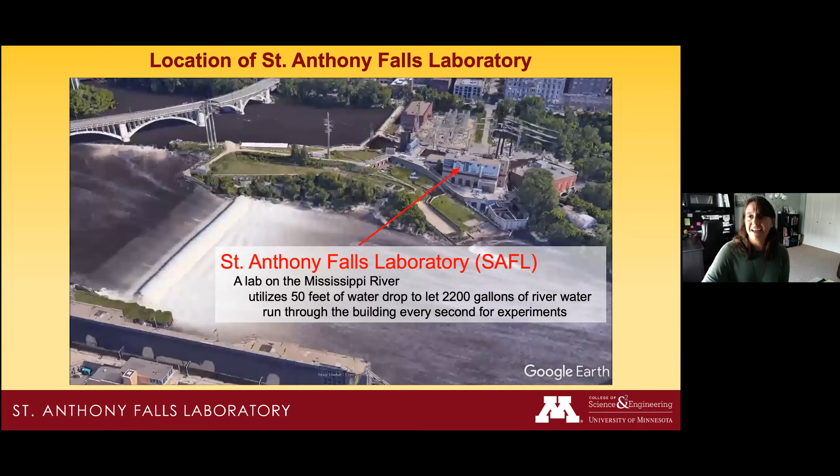But what's really cool is that we are in this specific location for a very concrete reason. And that's the fact that we're able to divert water from the Mississippi River. So right here we have our little gatehouse, and we're able to divert up to 2,200 gallons per second, or roughly 300 cubic feet per second, of river water through our facility for use in experiments. So our location is very deliberate. And it came from the vision of this gentleman right here, a gentleman by the name of Lorenz Straub.

He came to the University of Minnesota in 1930 as a faculty member, and he was fascinated by the concept of using experiments and physical models to better inform design, particularly as it relates to river hydraulics and engineering. At the time, in the 1930s, it was very much about how can we make rivers work and serve us. So looking at hydroelectric dams, looking at levees, looking at being able to essentially move and direct water to where we needed it.

He looked at the location. There was a pumping station on site before SAFL was there, but he was really interested in finding a way to build a hydraulic research laboratory utilizing the Mississippi. So in 1935, after the signing of the Works Progress Administration program to help people get out of the Great Depression era, we were able to secure funding for construction of the building.

Construction started in 1936, and the building was dedicated in 1938. And just because we have them, there are so many cool construction-related photos of the laboratory. So you can see this is on Hennepin Island. You can see all of the limestone that was starting to be excavated. This is where they were starting to dig out for our supply channel that fits into the building.

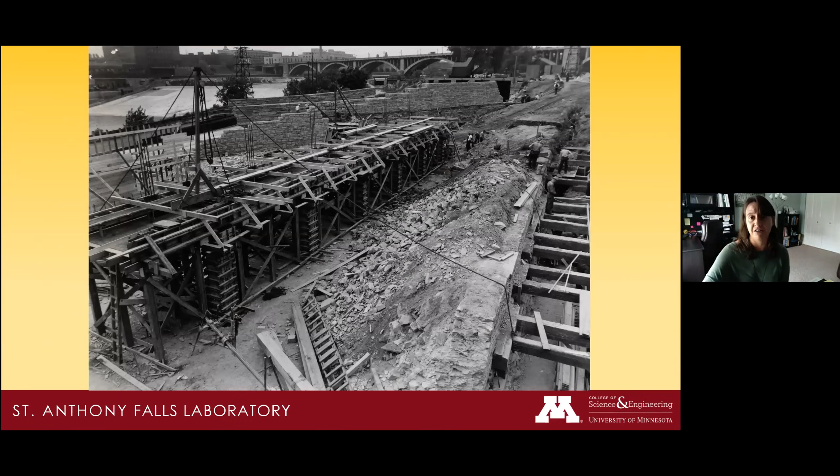And that's because when the pumping station was here, this was the level that the turbine was at, and it stayed there for a number of years. So our basement is called the turbine level. But down here in the corner, you actually see this channel. This is the outflow channel that was designed for the pumping station, and we actually still utilize it as our outflow channel. So water comes in up on top, goes through our building, 50 feet, comes out this channel. And this channel was actually built in the 1880s.

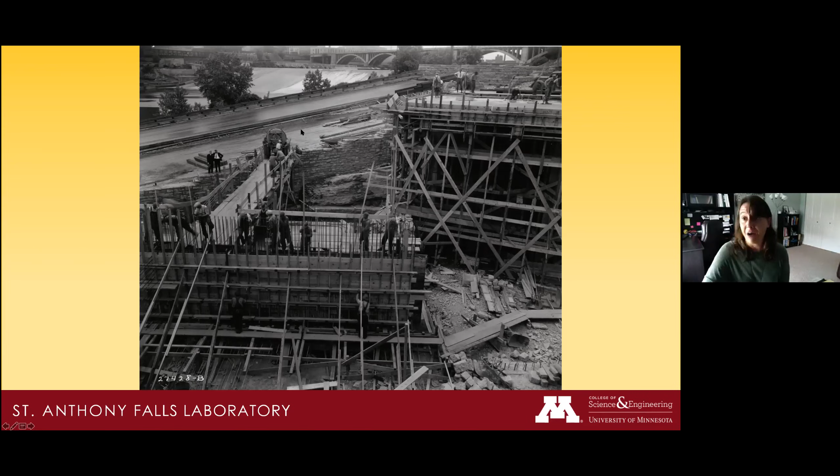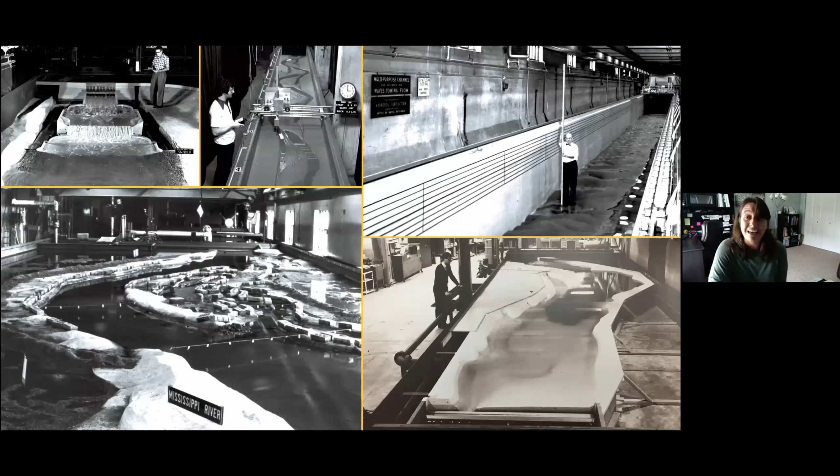So we were dedicated in 1938. So in 2018, we celebrated our 80-year anniversary, which was a lot of fun. Again, some historic photos of what it looked like inside the building once it was constructed. Over here in the upper right, you can actually see our main channel. Love the fact that we're wearing bow ties to work. We have the Mississippi River model that was actually in the building for a number of years, looking at how rivers move and bend.

This one down in the lower right actually has significance for me. This is actually of the St. Croix River. This is Heinz Stefan, one of our faculty, standing there. But this was for a study for the Allen S. King power plant. And I live in Bayport, Minnesota, so I can actually see the smokestack from that power plant out my window. And it was a study looking at how the effluent discharged by the power plant actually impacted the river's thermodynamics.

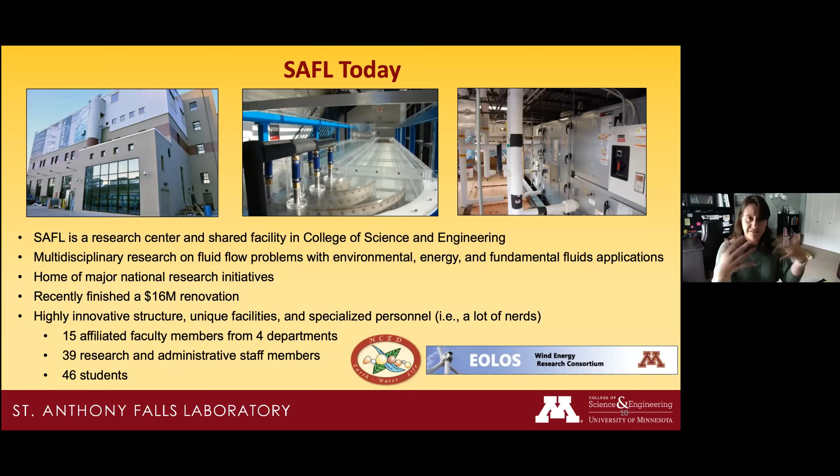So we have a nice large student group that works at SAFL. And aside from that, we also have our own applied research team at SAFL as well. So we have both a permanent staff, and then the faculty are able to bring in their projects as well.

So where we're kind of focused now in terms of what we study. So we have fundamental fluid mechanics. So again, we have this interplay of both basic research where you're looking just to expand the knowledge of a field, but we also do a lot of applied research. And so research that's going to be input into a real-time process right now.

So in fundamental fluid mechanics, we do a lot in atmospheric flows. So just understanding the turbulence and nature of how air moves in the lower atmosphere. Multi-phase interactions, so where you have essentially two fluids of different densities or properties interacting with one another. Turbulence, we do a lot of sensor development and technology innovation.

In the environment, obviously a lot of complex environmental issues right now as it relates to climate change and the health and sustainability and management of a lot of our water bodies. So we work in lakes, rivers, groundwater, we work in the ocean, we work with deltas and the vulnerable environments that they are in. We're looking at the interplay of water, sediment, vegetation, and other aquatic organisms as well as how do we as humans live on this landscape, and how do we promote solutions that kind of help deal with the fact that we as humans continue to modify and change our environment.

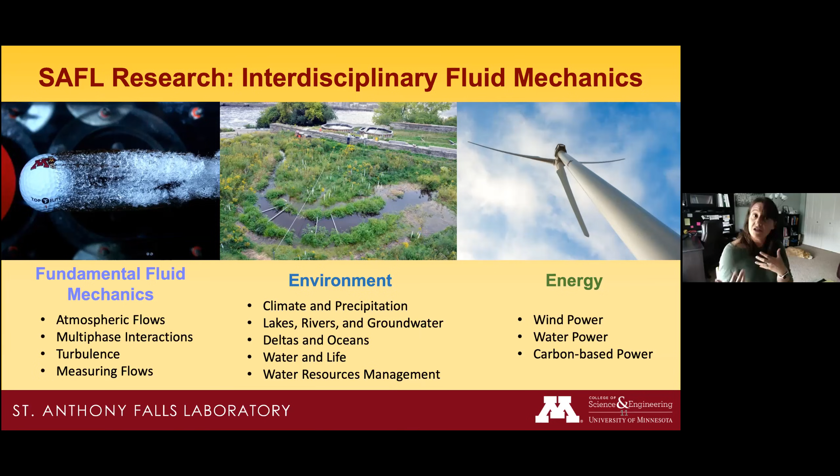And then also looking into wind power, wind energy, water power as it relates to traditional hydropower, as well as innovations in that, which Mirko's going to talk a lot about. And then carbon-based power. So we've worked in more oil and gas related applications in the past, and also looking at biofuels as well.

So what do we have? What's in the building? We have some amazing research facilities, right? And so a lot of people on tours ask me, well, what really makes SAFL unique? The research facilities are definitely a very important part of that equation. So we have numerous flumes and channels that we're able to use for research. We have modeling basins, we have a couple water tunnels, we have a wind tunnel, and we have the ability to create instrumentation that takes really high quality, detailed measurements, as well as we're able to calibrate as well.

And so we have a really good understanding of what's coming in the building, how do we make sure that we're collecting that high quality data. We have our outdoor StreamLab, and we do have a full machine and fabrication shop on site. I like to call us the original makerspace, since that is very much an in vogue thing right now, to have these spaces where you have access to a lot of different resources and equipment. We have had that since the beginning.

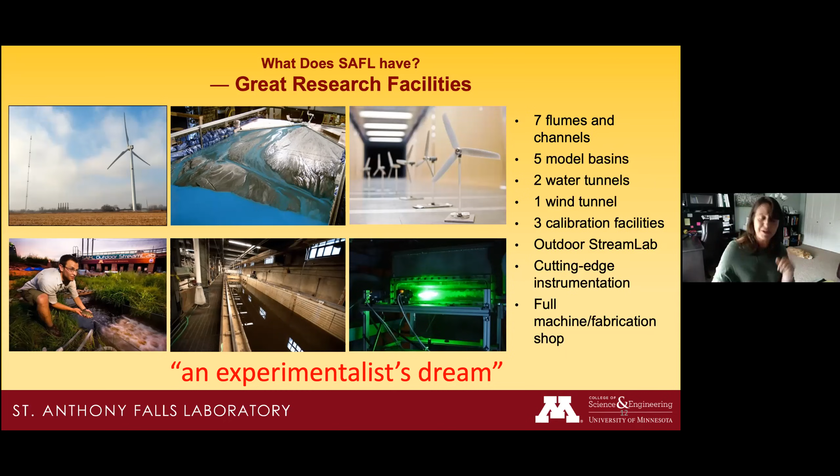So we like to consider ourselves an experimentalist's dream. But aside from the facility, you're going to find a lot of these different types of facilities at other institutions, but I think something that really does make us unique is not just the scale of the facilities we have, but the people who work here as well.

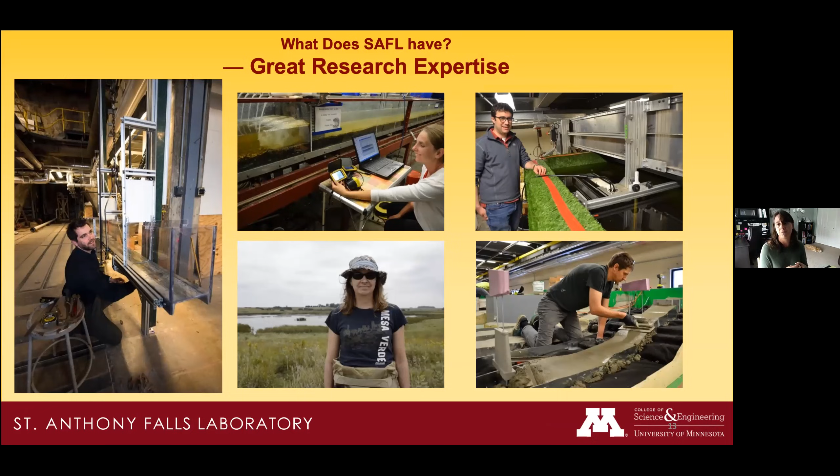And so again, speaking to that applied engineering team and those who help the faculty and their students with research as well as doing their own research projects, we're able to fabricate flumes, we're able to create something out of nothing, which is something that really makes SAFL exciting, right? But we also have the ability to have all these folks involved in research, which is honestly a lot of fun. So the legacy of expertise, as well as the facilities itself, is what makes it really exciting to work at SAFL.

One thing that I'm not able to usually show on a physical tour is talking about our computational capabilities. And so as we've gotten the advent of supercomputers, SAFL has really kind of worked into being able to do this computational fluid dynamics. So Lian, our director, works a lot in CFD.

One of the things we do at SAFL when we approach a research problem, we have the ability to approach it from a laboratory, an experimental sort of framework. We're able to have people go out in the field and collect data and do really great field work, but then being able to incorporate these numerical approaches as well. Essentially, you're attacking a problem from a lot of different angles and creating these really robust research packages, which really kind of makes what comes out of our laboratory a really high standard of work.

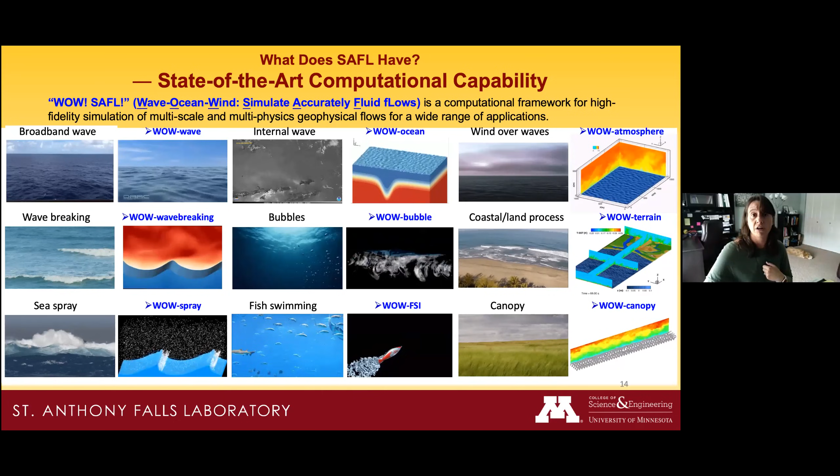So what I'm going to do is I'm just going to pull out a couple of these really unique facilities that everybody wants to see when they come in the building. It is limited. I'm not going to be able to go through everything at all. So I'm just choosing a few, especially of the ones of the research that we see focused on today, the ones that you're going to be hearing talked about.

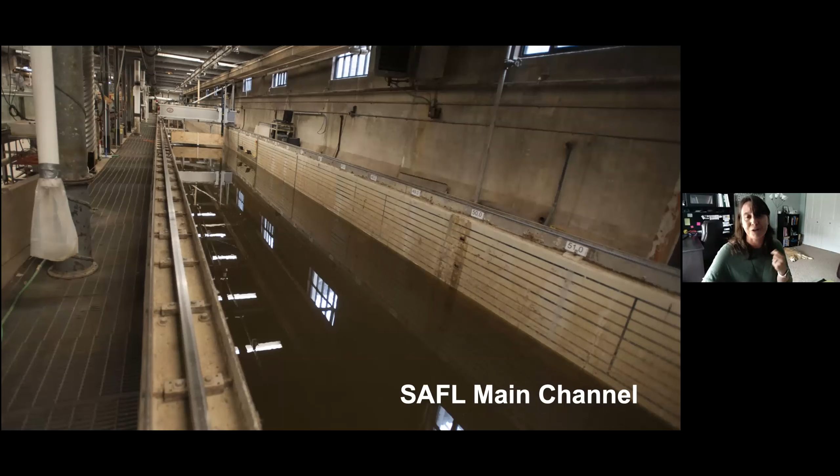So here's our main channel. It's original to the building. It is the flume that can handle the most amount of flow diverted from the Mississippi River, up to that 300 CFS. And so that is Mississippi River water that you see in it. So it's really cool to be able to turn the river on, so to speak. And so here it is turned on.

So this was during a summer workshop that we had for some aspiring academic professionals. And we needed to flush the main channel that day from an experiment that we had been doing on channel elevation that had a really steep slope. So we just welcomed everybody downstairs to essentially kind of watch the bed be eroded. And so they're able to see some really interesting geomorphic features and flows just in this flush.

It is one of the largest research channels in the US, so we have a lot of external folks come and use it from time to time. It does have sediment recirculation, and so we are always very cognizant that when we bring the river in, we don't want to discharge it back downstream with anything in it that we can avoid.

So we do have a sediment settling basin at the downstream end of the main channel, and we also have a sediment recirculation system. And so that's a nice kind of cost-effective use of being able to say, well, if we're going to input sediments, obviously then we're going to be able to collect that sediment and recirculate it back up to the top. And so this is something that a lot of our research channels and flumes have the ability to do.

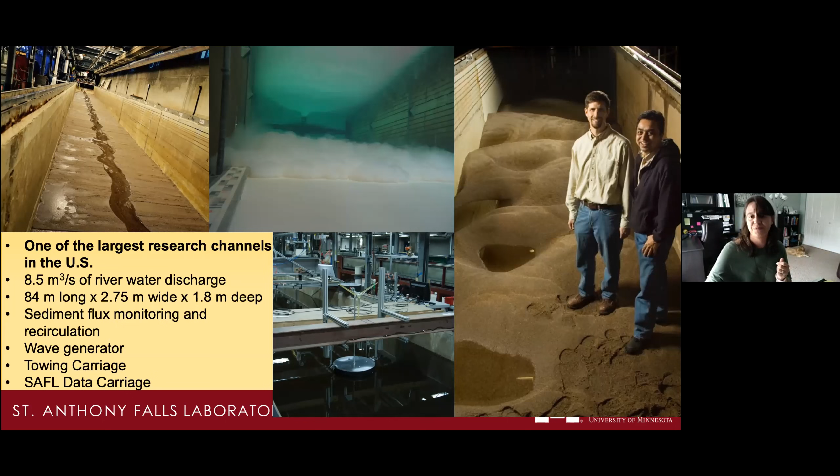The Outdoor StreamLab is another facility you're going to hear about today. This is a facility that came online in 2008. It was part of the National Center for Earth Surface Dynamics from the National Science Foundation. They helped fund the creation of this facility. It's on one of the flood bypass channels that you saw in the historic photos.

What we have here is an experimental stream and floodplain system. The cool thing is that we get the best of both worlds. It's a step between the field and the laboratory. In the laboratory, we can control most of the variables, right? But when you go out in the field, essentially you're observing the environment. You don't get to control much. Here in the OSL, we can actually control the amount of flow and sediment coming into the system.

We can't control natural sunlight and vegetation. We have seeded it with native prairie vegetation. We do have to go out and weed it from time to time because invasive vegetation does make it in. So we get more of the ecological component in a lot of our experiments that you're not going to be able to replicate in a laboratory environment.

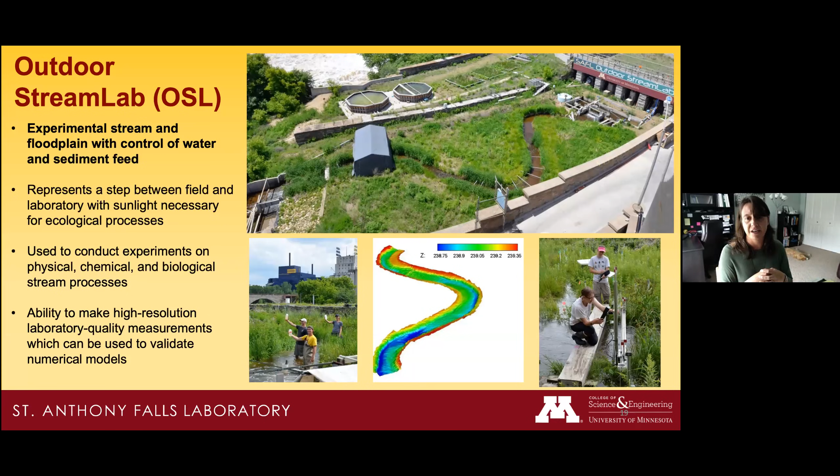We also have underneath this tent one of our data carriages. This is a system that was designed at SAFL, and it enables us to collect really high resolution measurements of topography, or very systematically take data of velocity, or whatever sensor we're able to move on those carts. They know where they are in 3D space. So it's a super cool facility where we're able to collect a lot of high resolution data.

I have a time lapse of a flood that we did in the OSL. We have the ability to flood this entire basin irrespective of what the main channel of the Mississippi River is doing, so we can do it in the middle of the summer or in the fall. In this particular experiment, they were looking at denitrification, and wanted to flood the channel and floodplain and take it back down. You'll see these piezometers, these white tubes in the floodplain, so we can monitor subsurface conditions.

Another one that I want to mention is our wind tunnel. The wind tunnel is a facility that is not original to the building. It offers this cool step of, again, how SAFL has evolved over the decades. This was a facility built in the mid-1980s, designed to study boundary layer effects on natural and urban environments. It can be either a closed loop or an open loop system.

The fan that initiates the wind is right over here, and we can have wind speeds reach up to 148 feet per second in the wind tunnel. It is temperature controlled as well, and that's obviously a variable for a lot of different experiments, so we do have that control.

A lot of the research in the wind tunnel is related to wind farms and wind farm siting. As you have air approaching the wind turbine, the air structure behind the turbine is obviously disrupted because of the interaction with the blades. How does that wake impact power generation of surrounding wind turbines? We can play with different configurations.

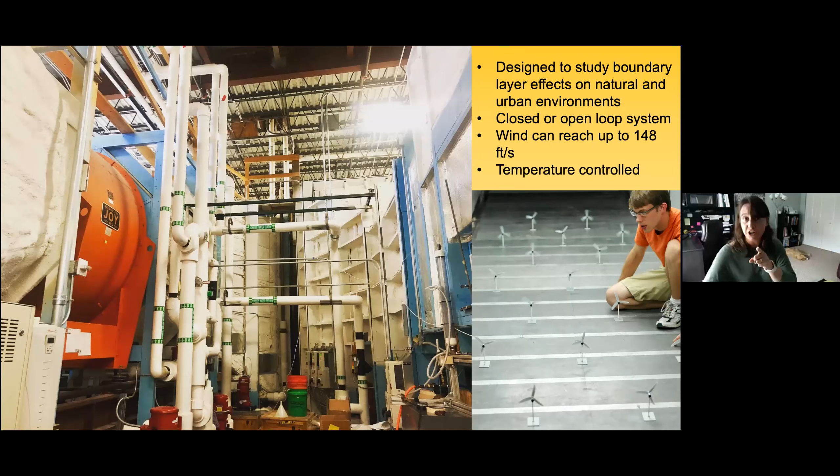One other thing that we do is construct facilities as needed. We have a space in the laboratory called the model floor, where we can construct whatever we need for an experiment. In 2011, there was a very large flood in Minot, North Dakota. It necessitated the evacuation of over 10,000 people. In redesigning that flooding infrastructure, we were asked to construct a model of a proposed pumping station.

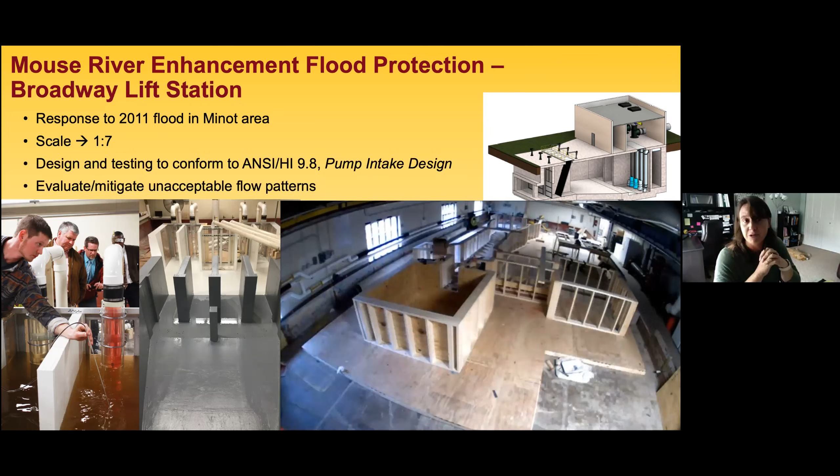The time lapse you see down in the corner shows them constructing a 1:7 model of that proposed station. What physical models are designed to do is, before you go to full construction, give you a good idea of whether your design is going to work the way you intend. That's a niche we can fill: offering suggestions, improvements, and recommendations before going to full scale. This proposed pumping station, I believe, is actually under construction as we speak in Minot.

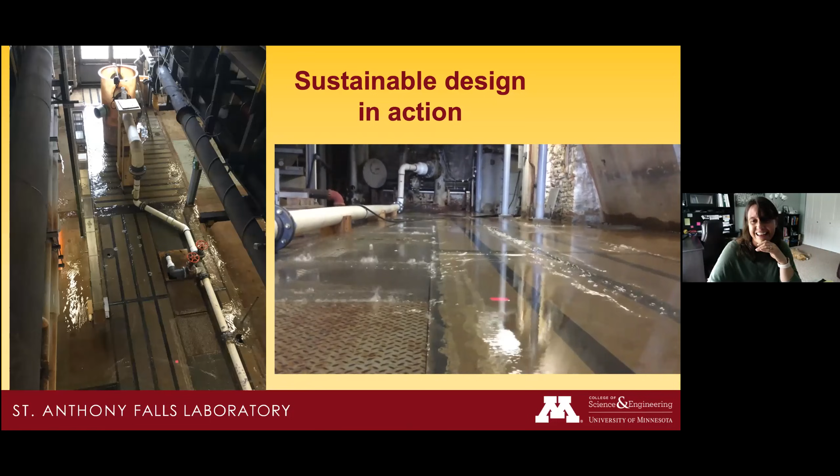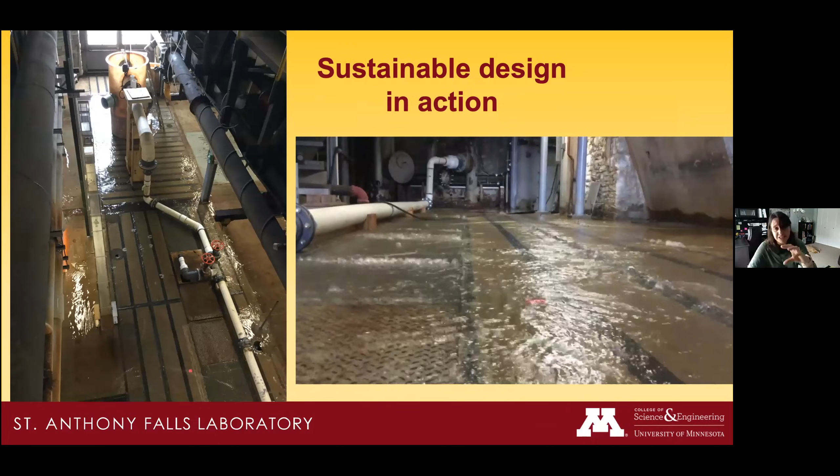The most amount of water that's ever been here is about 5 feet. And that was in the 1965 flood that we experienced here in Minnesota. But a lot of times we might just get a few inches of water kind of surging up and in. But other times we get enough feet that sometimes some of our researchers just want to take a nice little kayak break down in the basement.

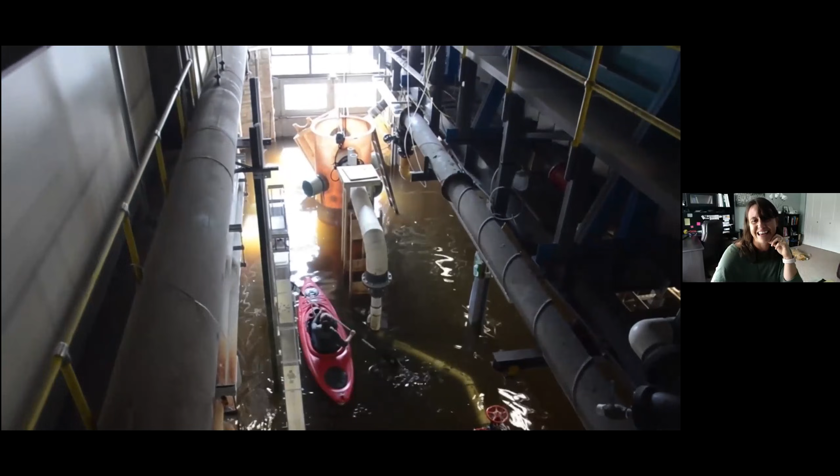So this is actually Jess Kozarek, who I'm going to be turning this over to in just a minute, and she's taking a kayak around the basement floor. So just a really interesting kind of more sustainable design aspect of SAFL is just the fact that in recognizing even in the 1930s that you got to work with the river, not against it, right?

All right, so this is where I'm actually going to turn things over to our researchers. So Joelle already introduced them, but we're going to be starting with Jess and then moving to Andy and then Mirko. Andy Erickson as well is also an alumni of the U. And so it's really nice to see an alumni be able to stick around and find their niche here with us. And one thing I do want to mention about Mirko: he actually was recently awarded the best dissertation in physical sciences and engineering by the UMN Graduate School. And so his dissertation research, which he's going to be talking about, really gets the thumbs up.

So with that, Jess, I'm going to turn it over to you. I will still be the one that is turning the slides, but I'll mute myself and you can go for it. Okay. All right, so I should mention I am not a U alum, but both of my parents are.

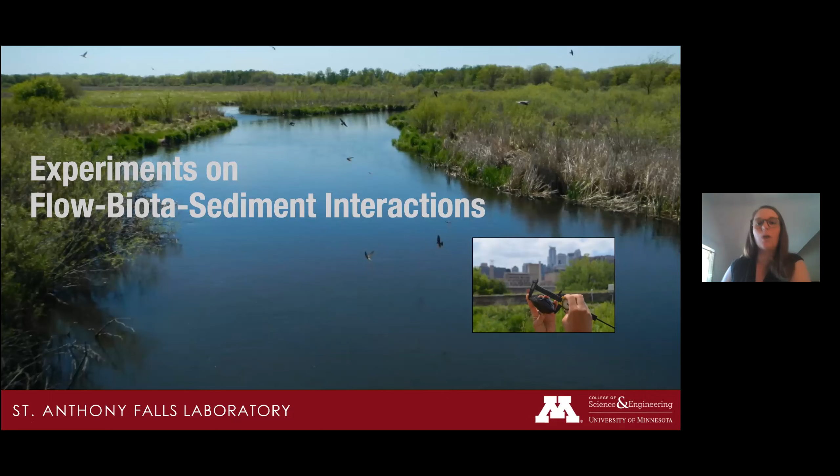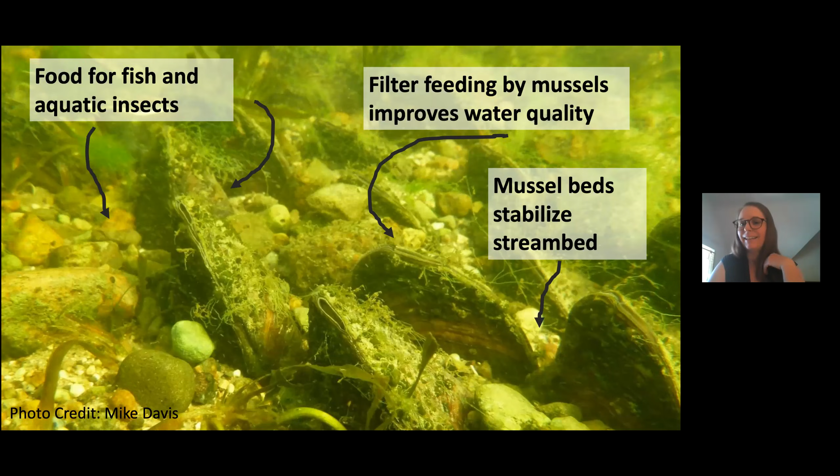So the project I'm talking about today was a fairly large interdisciplinary project between myself and my colleagues at Macalester College, Dan Hornbach, Kelly MacGregor, and Mark Hove. It was funded by the Minnesota Environment and Natural Resources Trust Fund. We had a large number of undergraduate researchers who worked on the project, input from Minnesota DNR, from United States Geological Survey, and from other colleagues at SAFL.

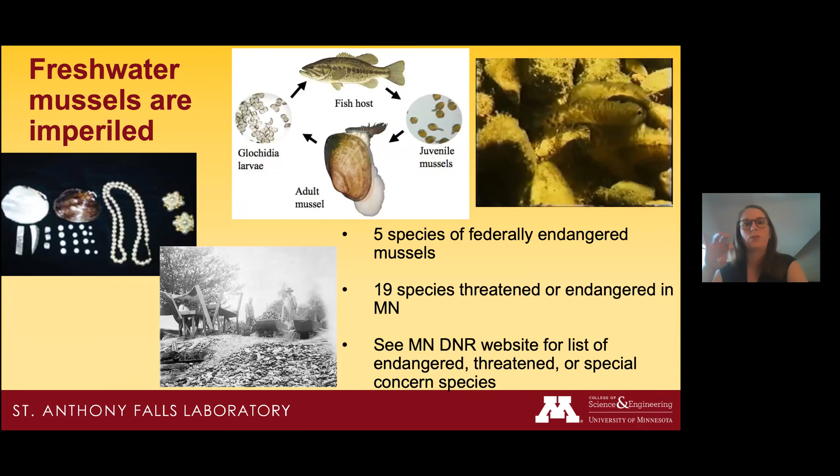If you have some spare time, there's a lot of videos out there with a lot of different adaptations for mussels, and it's really fascinating to watch. Some of them look like crayfish, some mussels clamp down on the fish. There's a whole variety there. That's not what I'm going to talk about today, though.

Today I want to talk about these experiments that we did at the Outdoor StreamLab that looked at how mussels respond to changing environmental conditions. So in this case, we're really looking at flood flows that carry high, fast velocities of water and high levels of sediment, both in terms of bed load, or the sediment that's moving along the bed, but also the suspended sediment.

And we're looking at how the mussels themselves can respond to these large flow events, either through behavioral response, so how does it change their feeding or their movement patterns, but also the metabolic response. So how does the glycogen or the energy store within the mussel change when they're exposed to what can be stressful events.

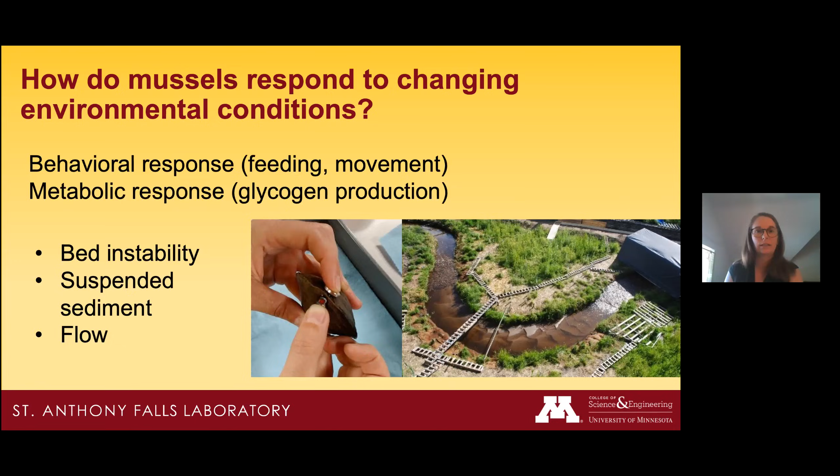Next slide. And so mussels live on the stream bed. And so their presence interacts with the flow near the stream bed, which can alter the local flow and the sediment transport in the vicinity of the stream bed. Next slide. So again, we used the Outdoor StreamLab and flumes at St. Anthony Falls Laboratory to ask these questions. Here's a picture of the Outdoor StreamLab and the location of our test mussel bed. Next slide.

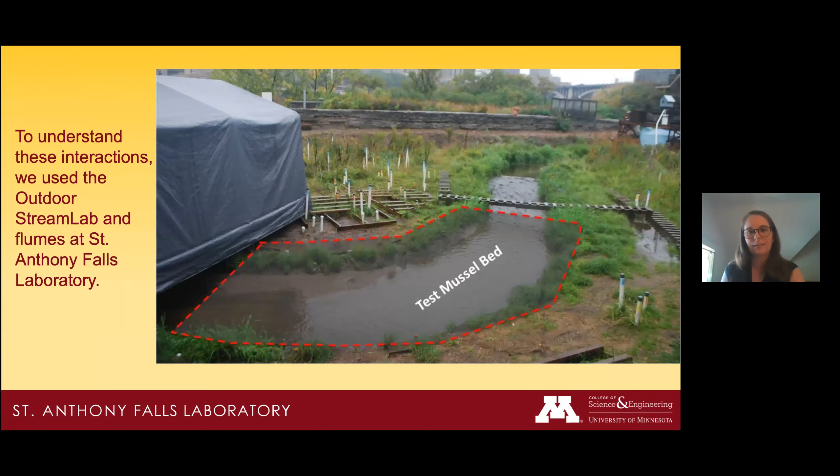Okay, so here's a video of one of our flood events in the Outdoor StreamLab, and you'll see a mussel in the upper left-hand corner. You'll notice a couple things right away. The mussel is painted white, and we did that so that we could see the mussel through video, through the water surface, so that we could track them and see what was going on. The mussel also has a small white heart that's glued to it. Each mussel was uniquely identified using different colored sequins or different shapes of sequins.

And each mussel has a tail. That's a piece of floating fly fishing line. And we used that so that we could find the mussels if they were buried underneath the sediment, so that we could identify the string that was sticking up and figure out how far down the mussels were buried. The figure on the upper right shows the white dots are the original locations of the mussels at the start of the flood. The gray dots are the locations of the mussels after the flood. And you'll notice that generally speaking, the mussels didn't move much during the flood.

They're very close to their original positions. But what you can see along this red line, that's a transect that we're showing in this animation down below. And thank you, Barbara. And so this is a transect of data that was collected using a sonar. So basically it's showing how the bed is changing over this flood event.

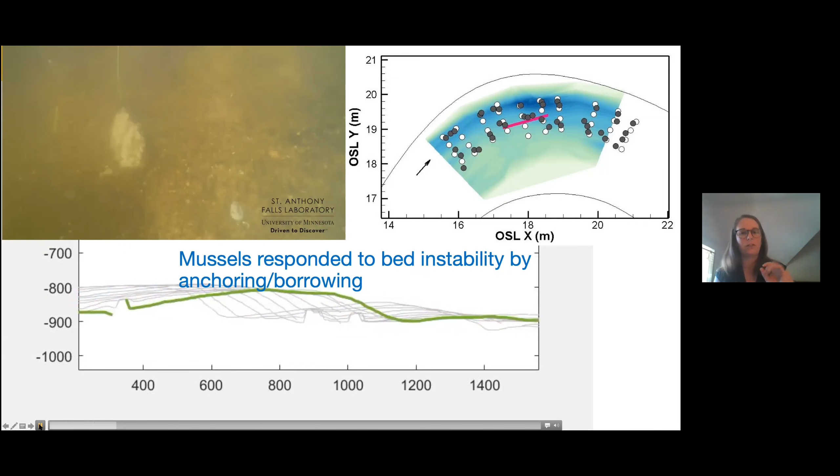So you can see that we have these bed forms or sand waves that are moving along the channel. And the mussels, you can see 3 mussels in this image. They look like this, yep, thank you, these trapezoidal shapes that are sticking up. And so during the flood, the mussels are constantly getting buried and then unburied and then buried again, but the position isn't changing much. They might be burrowing down a little bit deeper into the sediment, but mostly they're holding their position.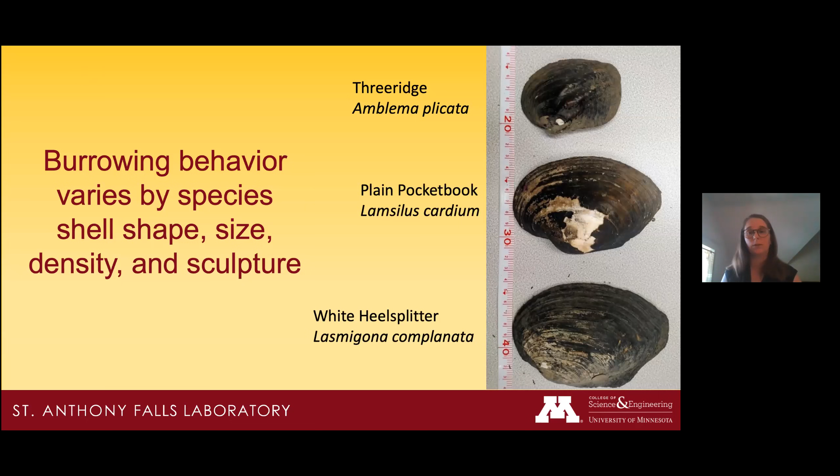Okay, so during the flood, mussels burrowed and they kind of held their position, but after the flood, what we found is that the mussels, if they were in a position that they didn't like to be, they tried to look for a better place. Most of the time, this was looking for deeper water. So after the flood, as the depth of the water came down, they started to hunt for deeper water.

We did do some experiments where we removed the deeper water areas, and that's what you're seeing here. This is a time lapse over a couple hours. And you can see that the mussels are actually moving quite a bit, and they're looking for deeper water, but as there isn't any deeper water present, they're kind of moving in random directions.

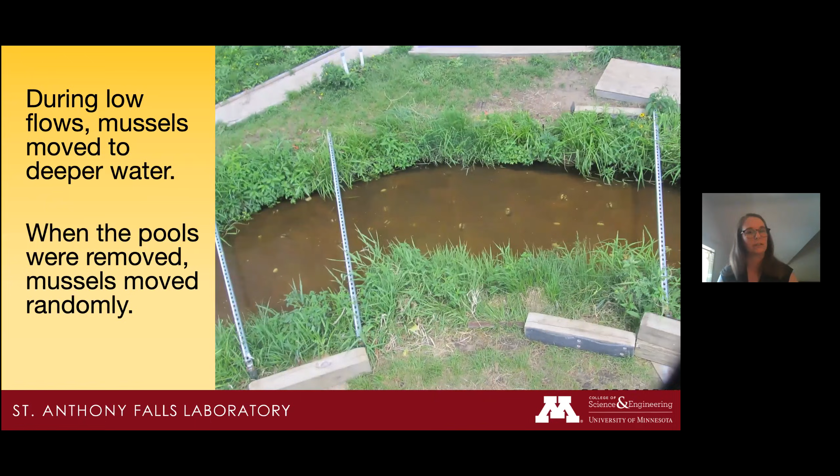Next slide. So we also, that's okay, go ahead.

Okay, so we also looked at mussel feeding behavior. And to do that, we instrumented all of our mussels to look at their gape. Are they open or are they closed, and how is that changing with sediment? And so one thing that we saw as sediment increased, we saw a lot more very quick closure events, which meant that the mussels were basically spitting out sediment. And so we could pick that up in the signal that we got from these gape sensors, whether the mussels were open or closed. And so you can go on to the next slide.

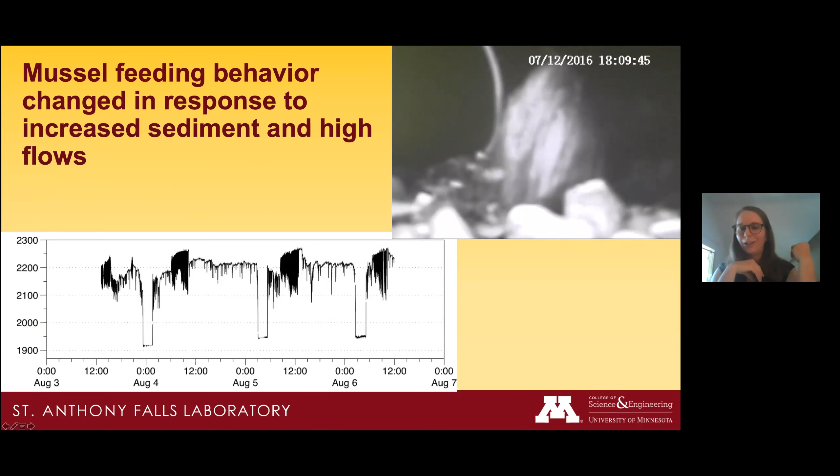So again, this is just an example of the kind of experiments we can do in the outdoor StreamLab. One of its big advantages is that we can incorporate biology into our studies of rivers and streams. And so I talked about mussels here, but we've done similar kind of experiments looking at the feedbacks between vegetation growth and channel morphology, for example.

And so we found that these mussels responded to changing environmental conditions, but the adult mussels that we studied here were generally able to handle the flood flows that we were able to throw at them. But when you look at the whole watershed scale, these mussels are exposed to many interacting stressors, both at different life stages, but also with water quality, habitat loss, sedimentation, channel modification, host fish availability, and invasive species impact, so competition with zebra mussels. And so there's still a lot that we have left to learn about freshwater mussels.

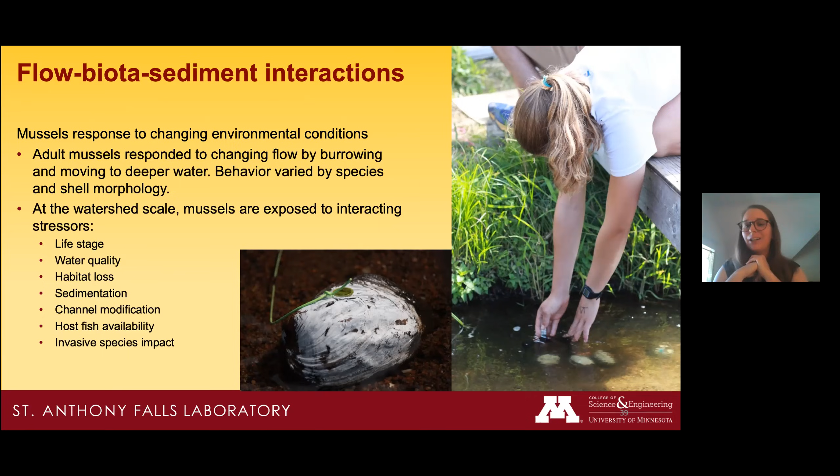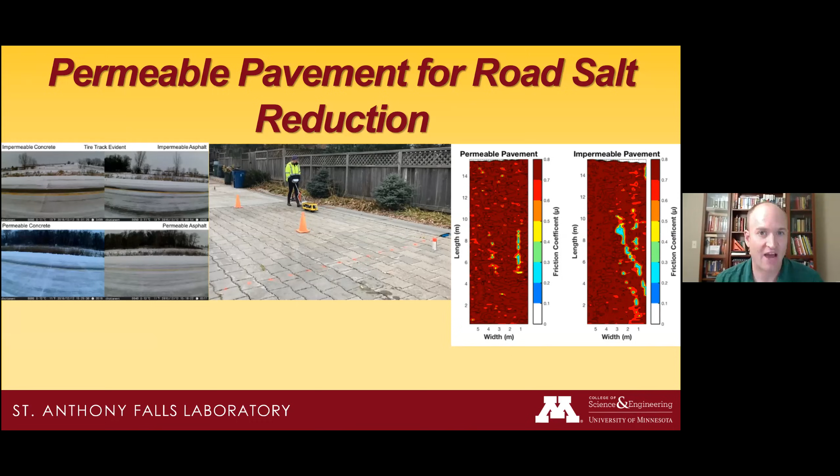St. Anthony Falls Lab. Today I'm going to talk about a project that's actually an example of field research that we do out of St. Anthony Falls Lab, and this is on permeable pavements, specifically for road salt reduction. And maybe some of you have seen what permeable pavements are, maybe some of you haven't, so I'll talk about that on the next slide.

What we use permeable pavements for is as a replacement for conventional pavements. And they can be asphalt, they can be concrete, they could be block pavers. Maybe some of you have some of these in your neighborhoods. There's a number of them in Minnesota, but also around the world as well. Some of the key benefits for permeable pavements is that they provide volume reduction in stormwater runoff.

So during rain events, the purpose of permeable pavements is to allow the rain to actually go through the pavement as opposed to running off onto the side slopes. And so that's the key benefit. It reduces the volume of runoff from these streets and paved areas. As a result, it also improves water quality because there's less water washing off the roads, there are less pollutants being washed off the road.

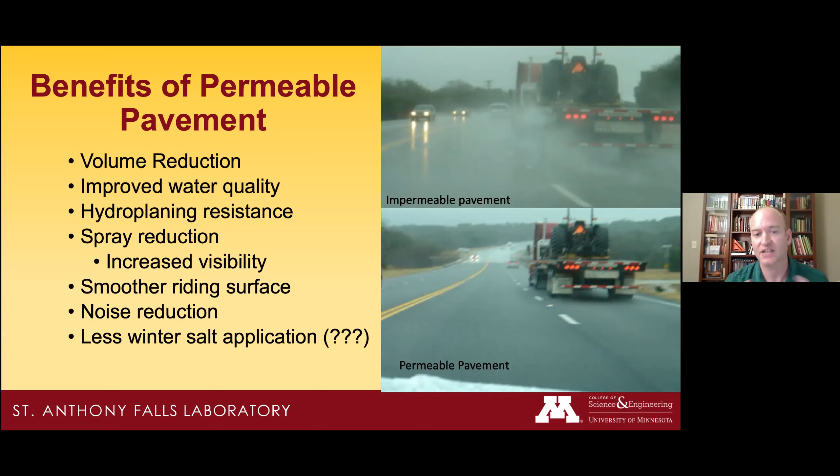So as you're driving on the roadway, there's less bumps and vibrations and less noise coming from the vehicles because a lot of the sound is actually going into those permeable spaces in the pavement. What we wanted to address in our research was, is there a winter benefit? Can we apply less road salt, which actually ends up in the environment, in our groundwater and our surface waters, if we have permeable pavement compared to conventional pavement? So on the next slide, I can show you how we did this.

We started with some previous research that was done by Wenck Associates and the city of Robbinsdale here in Minnesota. They collected some preliminary data to look at, is this even really a feasible question to ask? Is there really any winter benefit? And from this photo, you can see in the foreground a conventional, non-porous or impermeable pavement that was not salted, compared to a permeable pavement in the background of this photo. And just visually, we can see more snow and ice on the impermeable pavement compared to the permeable.

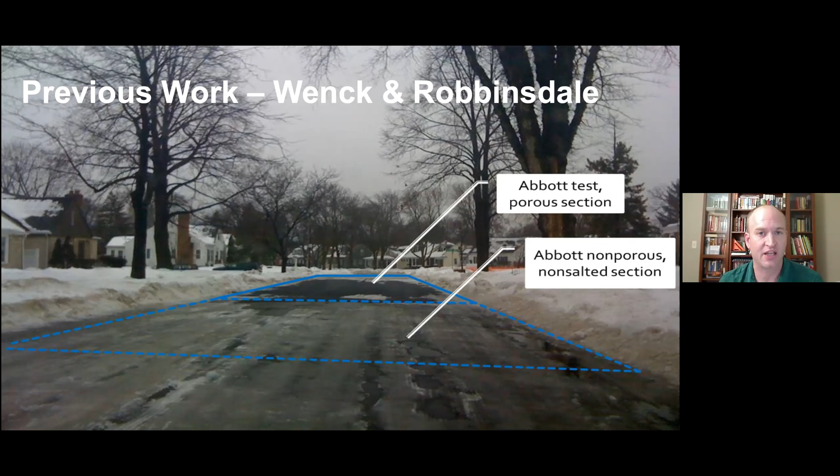But from the photo, it can be hard to quantify. What is the percent benefit? What is the quantitative benefit here? And is this just this particular situation, this day, these climate conditions? Or is this more persistent? How often does this happen? So then we took data, looked at other information that they collected, and collected more data. So the next slide will show some temperature data that's actually collected throughout the pavement.

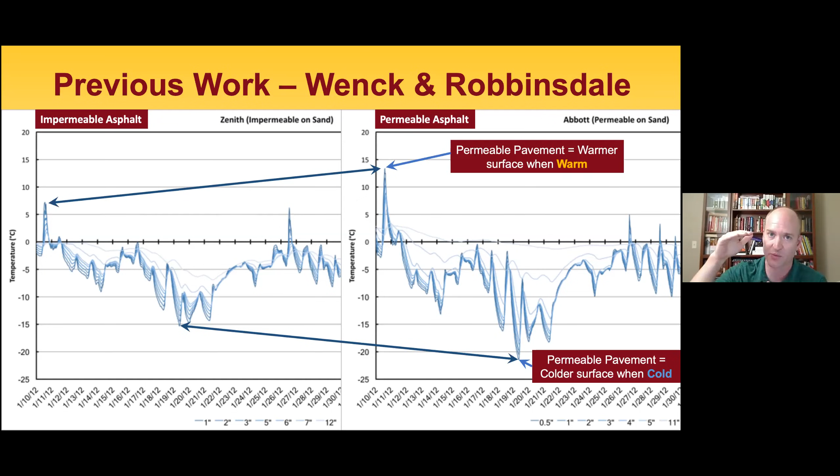So there were temperature sensors installed right near the surface of the pavement, and then at several increments all the way down to about 18 inches below the pavement surface. And in these two plots, on the left is the impermeable asphalt or impermeable pavement section, and the same range of dates on the permeable section on the right. And I've highlighted just a few peaks to demonstrate the differences between these.

So first, when the surface of the pavement is warm, so during warm weather, again, this is winter, you can see the dates here in January of 2012, so it's still winter conditions, but relatively, when the temperature is warm, the permeable pavement surface is warmer than the conventional pavement. And also when the pavement surface is cold, the permeable pavement is actually colder than the impermeable pavement. So that was quite interesting. The surface temperature of these permeable pavements changes more than a conventional pavement.

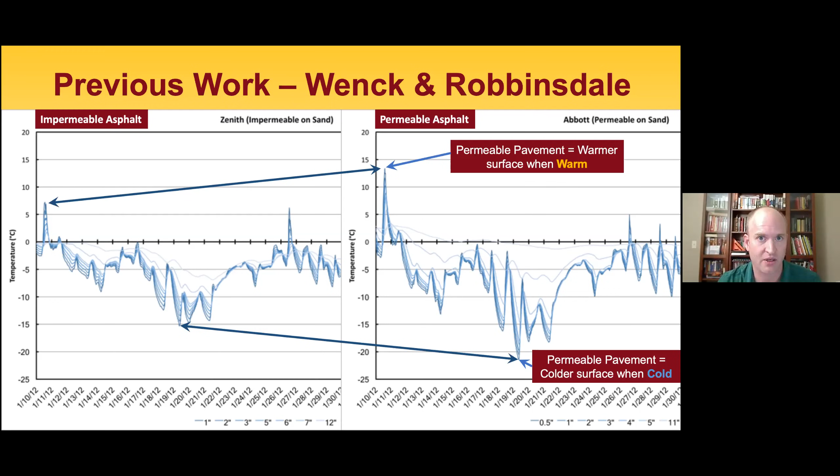On the next slide, we can see that also the difference in temperature between the surface and below the surface, in this case to about 18 inches below, there's actually a larger difference in temperature as well on the permeable pavement on the right compared to the conventional or impermeable pavement on the left. And what these two graphs really tell us is that permeable pavements are insulating.

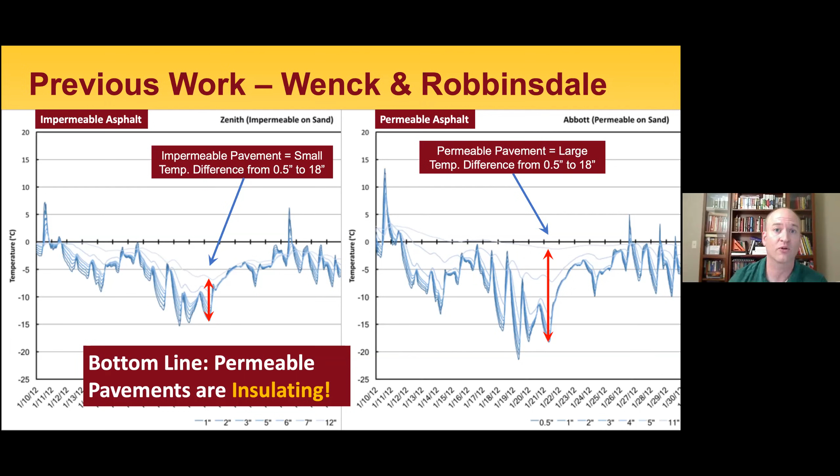They are preventing the heat from moving either from the surface down towards the ground or from the ground up to the surface. They are preventing that movement of heat, and that can have a big impact on what the surface conditions of the pavement are. That's kind of an example of the fundamental aspects. What are the thermodynamics of these pavement sections?

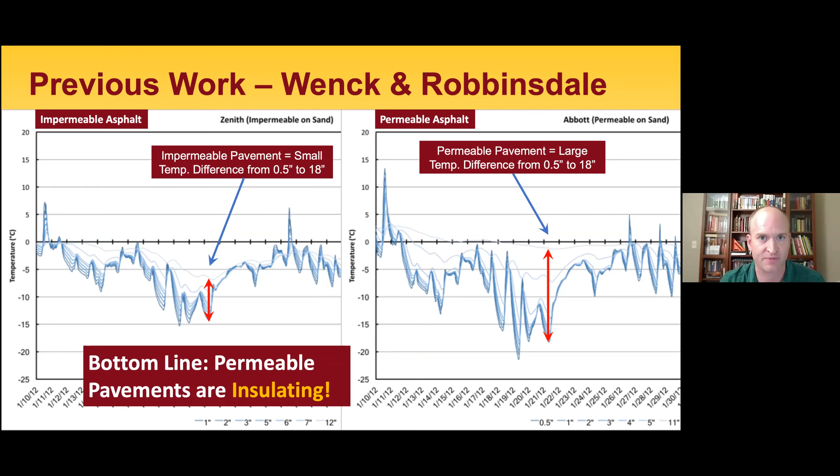But at the end of the day, we really want to know, is the pavement safe to drive on? So on the next slide, I introduce how we measured friction to quantify that safety. Because you can still have a little snow or ice on a pavement and you can have good traction, good stopping distance, good road safety. And in other cases, maybe not. So we wanted to measure friction to measure that.

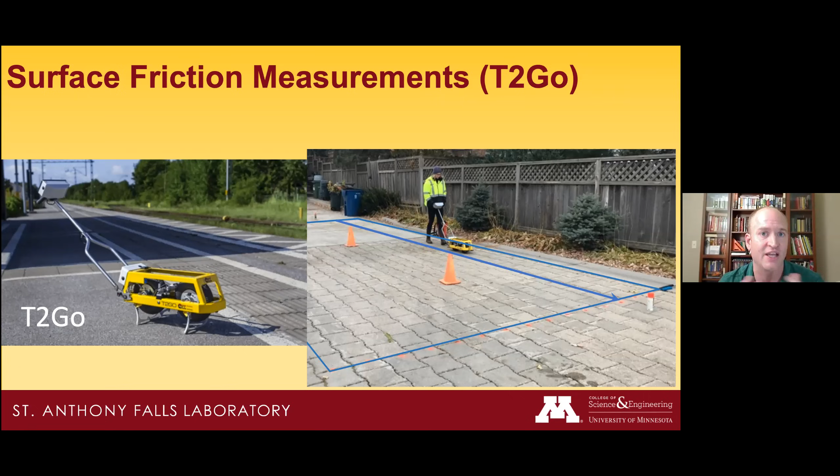And this is using a portable friction tester called the T2Go. It's a relatively small device that you just push along the surface. It measures the friction in real time, as well as the surface temperature, air temperature, relative humidity, and other things. We will focus on the friction, which on the next slide is an example from the Maplewood Public Works facility, where the parking lot is permeable asphalt, and that's shown on the left, and the drive lanes coming into the parking lot are impermeable asphalt or conventional asphalt.

All of the sites, and we measured friction on 22 different sites around the Twin Cities metropolitan area, have cases where a permeable pavement is immediately adjacent to an impermeable pavement, because we wanted the climatic conditions to be exactly the same for all of our measurements when comparing these two pavement types. In this case in Maplewood, we actually applied some water on the surface just to measure how much would soak in versus how much would freeze on the surface. And this test was done while the temperature was below freezing.

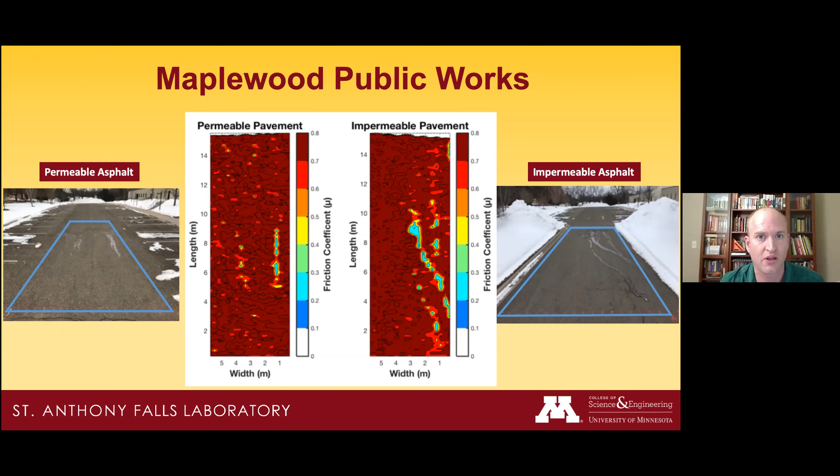And in the photos, you can see on the outsides of the slide, in the center is actually a map showing the friction. So if it's a red color, it has more friction or good friction. If it is more of a blue color, it has low friction, or in other words, more ice on the surface. And just visually from this, the photos and the graphics demonstrate that there's more ice on the impermeable pavement. And so that demonstrated that these porous surfaces, even if the temperature is cold, can allow water to soak through those pavements.

On the next slide is another example from another site. This is actually the city of Falcon Heights. In this case, the drive lane is the permeable section, and some of their parking areas are the impermeable section. So the impermeable pavement is the photo on the top and the graph on the top of this slide. And overall, in this case, I'm showing line graphs to demonstrate the friction. When the friction factor gets to about 0.35 is when you should start using caution. And when it's below 0.25, then it's actually very dangerous.

And there were instances here, you can see in the photos, snow and ice on the pavement surfaces, and you can see in the friction graphs, we would dip below some of those criteria. Also, overall, when you compare these two sites, you can see visually and in the friction measurement, there's less snow and ice on the impermeable pavement in the top compared to the permeable pavement on the bottom. But another big distinction is that there is meltwater pooling on the impermeable surfaces. And that's very important to note.

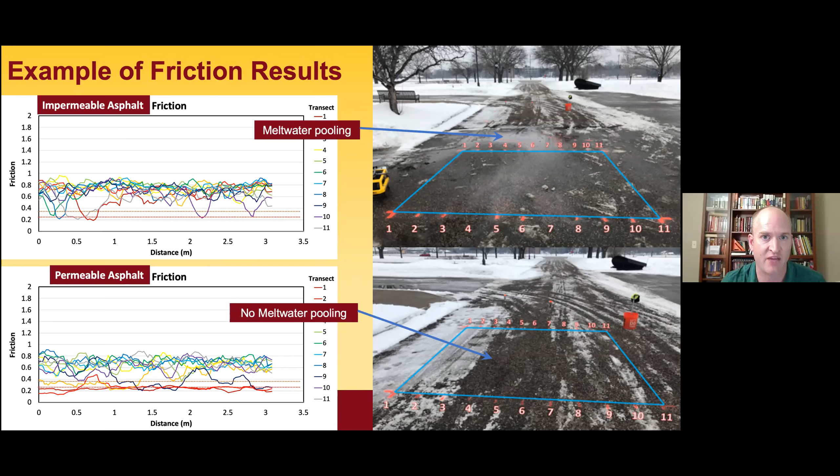When these measurements were taken on this particular day, it was above freezing during the day and below freezing at night. And so the snow and ice would melt on the impermeable pavements and pool there and then refreeze overnight. Whereas on the permeable pavements, there was no meltwater. As soon as the water would melt, it would soak through the pore spaces in that pavement and disappear. And so on the next slide, that led to our conclusions from this report.

Permeable pavements, as we saw in the early slides, function as thermal insulators. They prevent the heat from moving up and down through the pavement. So when the weather's warm, permeable pavements will be warmer on the surface. When the weather is cold, permeable pavements will be colder. Also, and I didn't get to show this just due to time constraints, we found some permeable pavements that were clogged with sediment, and some of the pores can get collapsed due to poor construction.

They're not permeable anymore, so they really do not provide any winter benefit in terms of allowing that meltwater to flow through. But if the permeable pavements are functioning as they were originally designed, then they can infiltrate the meltwater, and that is the primary winter benefit for these permeable pavements. So we can reduce our salt application rates and our salt impacts on our environment by using our permeable pavements.

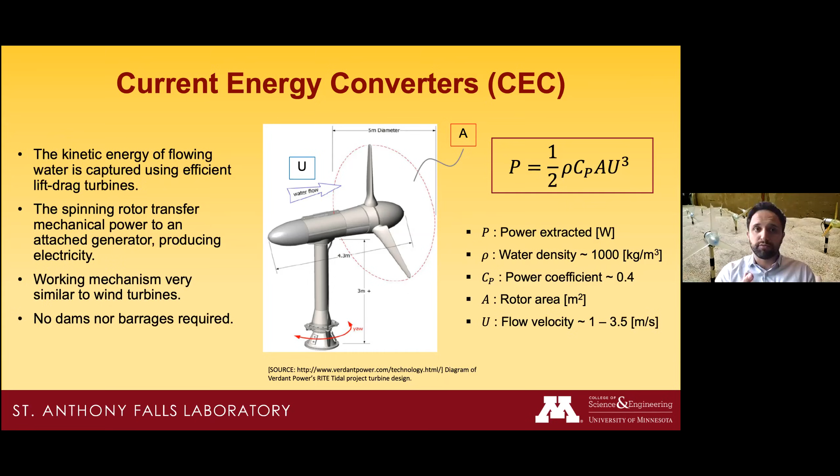generates electricity. And as you can see here from this equation, the power that you can extract is directly related to the size of your device through the area A, that is the area swept by the blades, but most importantly, because it's at the power of 3, the velocity of your fluid. Next slide. Before I show you what I did, I want to give you a little bit of background on the advantages and the current obstacles of this technology.

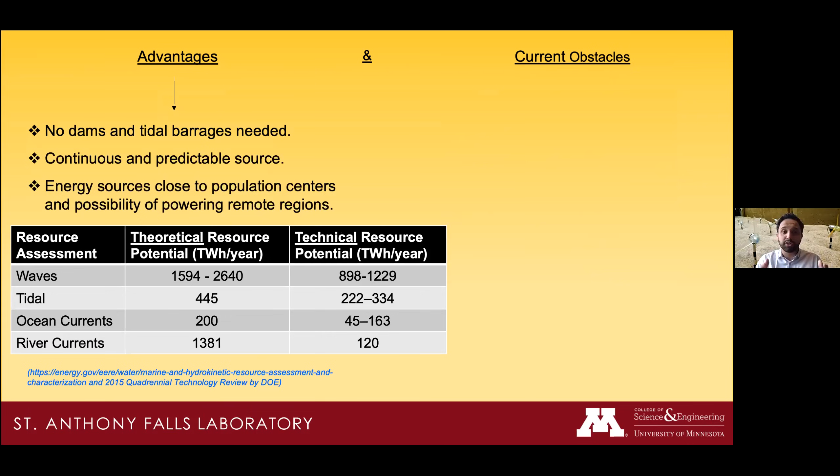So MHK can be perceived as a more eco-friendly alternative to the more conventional hydro, because it doesn't require a dam. So in conventional hydro, you would block a river to create energy from water, but you would block all the natural processes as well, creating some potential environmental problems. Also, it's a very predictable source. Now we have a good understanding of tides and rivers. And also, water bodies are close to population all over the world. So it could be really a good alternative for remote regions or developing countries.

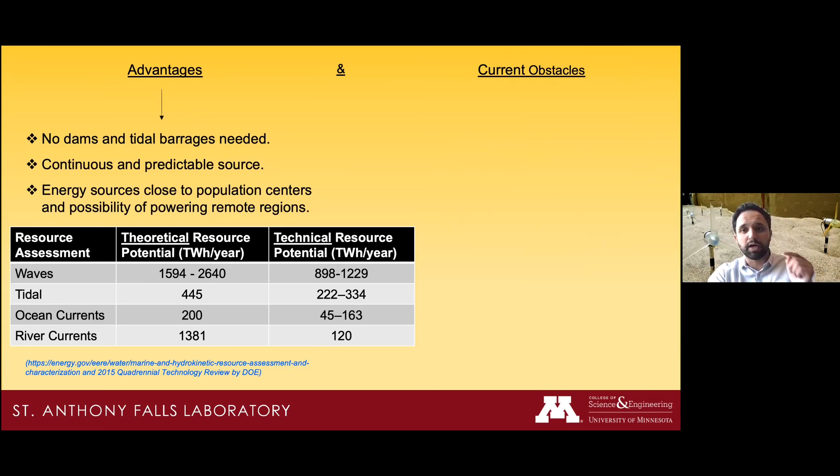However, despite a good theoretical resource, as you can see here from the table, the technically recoverable energy is quite low, especially for rivers. And this brings me to the first obstacles that this technology faces. As I said, it's a nascent technology. So right now, the industry is at its early stage. So there's low efficiency and a lack of optimization in design. So there's a zoo of devices right now.

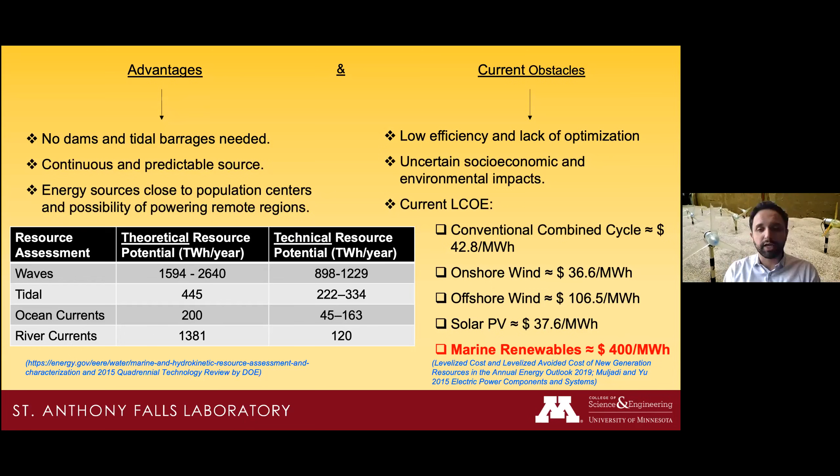And this, together with the uncertainties for the environmental impacts and the social impacts, makes the cost of this technology not yet competitive with the more conventional energy resources or the renewable energy alternatives. So for this reason, in my research, that I'll show you in the next slide, first of all, I wanted to try to encourage the application of this technology to rivers, because rivers are everywhere.

And in my research, we try to answer one of these uncertainties, specifically the interaction of these turbines with the physical environment where they're installed, such as the erodible bathymetry or the river shape, the river morphology, and so on. And we started by looking at the local scour induced by a turbine. We did that experimentally at SAFL using two turbine models at two different scales in two different channels, quantifying the scour and the spatial extension of this disturbance.

And we realized that qualitatively, this scour looks like a more common bridge pier scour that has been extensively studied in the past. But quantitatively, it's way more enhanced because the turbine introduces more turbulence and more chaotic motions. So for this reason, we extended the study to a more theoretical level in the next slide.

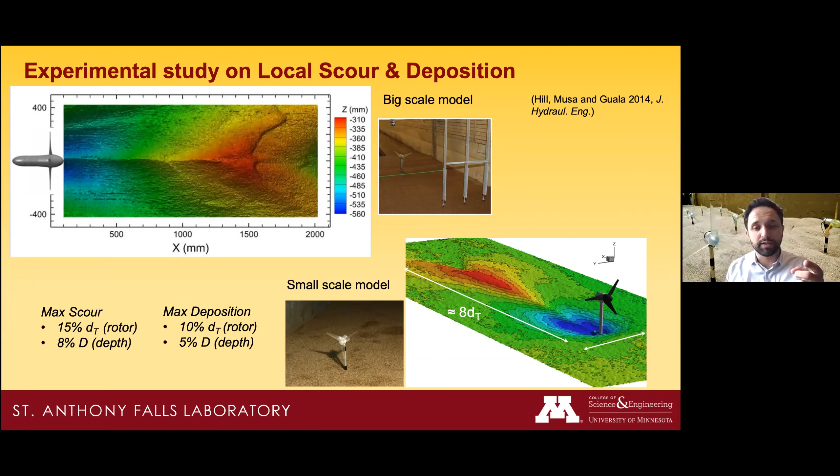And so we were able to come up with a model that could predict this local scour depending on the hydraulic condition of the channel, the sediment characteristics, but most importantly, the turbine operating condition, which is the key difference between a turbine and a static object like a bridge pier. And knowing the scour ahead is important not only for environmental purposes, but also during the design for the structural safety of the turbine.

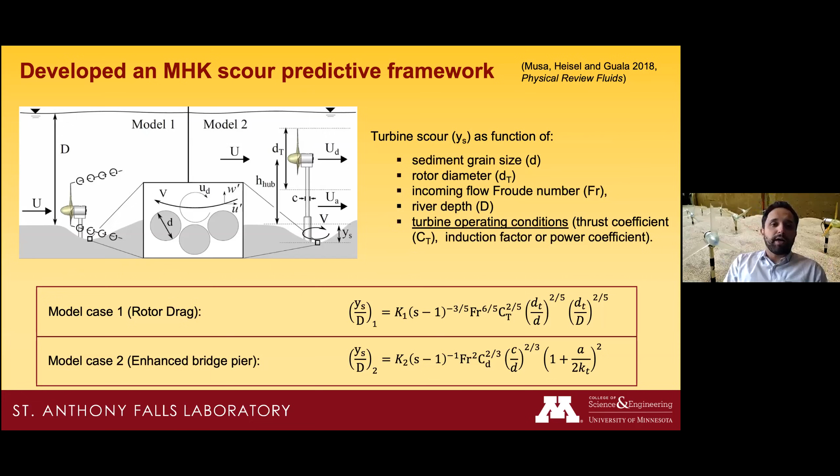And then in the next slide, I will show you that these turbines in real life will have to be deployed in arrays, so in groups of turbines, to make the technology economically viable and produce enough energy. So we decided to place 12 of these little models in the main channel, the big channel that Barbara showed you before. And we recreated a real river scenario in flooding conditions, with strong current, big depths with respect to the size of the turbine, and intense sediment transport.

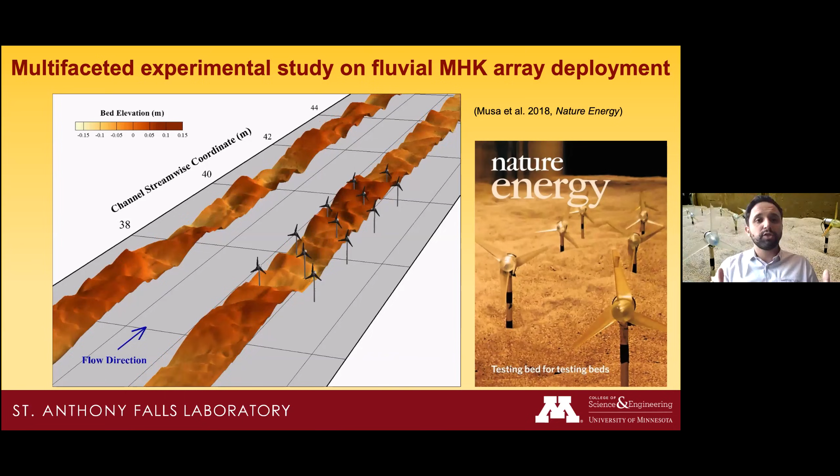So with the sand dunes that you can see here in the video, moving through the array and in the channel. The channel is that gray area that you see, and those two stripes are the two segments of bed forms and bathymetry that we were able to measure. So, next slide.

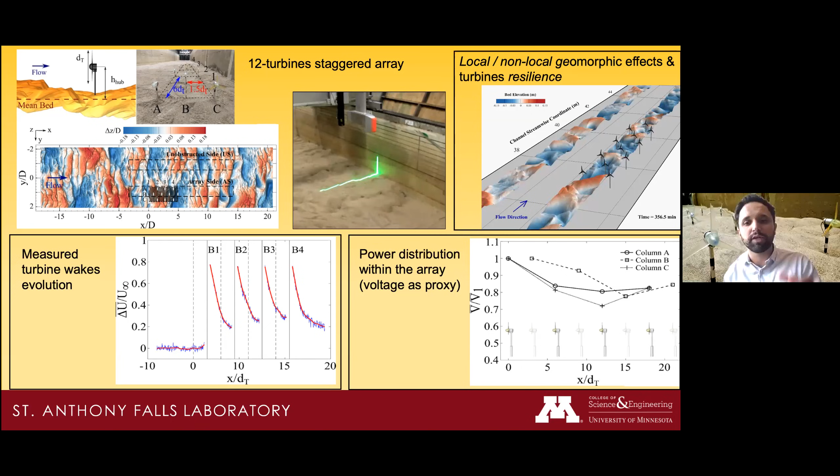So behind the turbine, you have a region called the wake where the velocity of the flow slows down because the turbine is extracting energy. And so the wake recovery is the longitudinal distance at which the fluid starts acting like the undisturbed one. And that's the distance where you want to place your next turbine. And we also measured the power distribution within the array. These are all parameters that are informative for the array sizing and the array siting, so for the design.

And what we found in the next slide is that the presence of the array does statistically introduce some perturbation in the river, which can lead to changes in the river shape and the river dynamics downstream of your turbines. However, we also found that if we minimize the lateral obstruction of the array within the river width, we can minimize these potential effects, making them potentially not important.

And we also found that despite the complexity of our river system, with the changing bathymetry and moving sand, all the other parameters that I mentioned really resemble what other researchers found for wind arrays. So that's important because then we can take that knowledge and apply it here for MHK designs.

And finally, probably my favorite result is that we found that, can you go back one slide? Is the self-defense mechanism. So the turbines have a self-defense mechanism.

So basically we realized, remember that we were running these experiments in flooding scenarios, so with intense sediment transport and with dunes that sometimes were as high as the blade level, which is this red region in the video. And so we realized that the same mechanism that was responsible for the local scour was acting here as a self-defense. So it was eroding incoming dunes and so preventing them from encroaching on the blades.